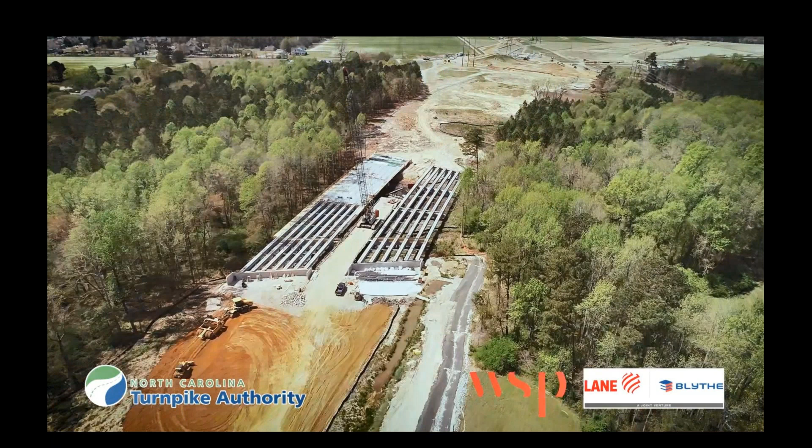So that was what we call the sizzle reel, just to get you guys excited about the project. We just had an introduction of ourselves, so we won't spend any time on that particular item. But as we get started here, I'd like to turn it over to Dennis to go through the 540 projects in more detail.

Thank you, Daniel. Can you hear me? Just get the thumbs up to make sure I'm not talking to myself. Okay, good. It's unfortunate that the sizzle reel, there's actually some very peppy music that typically goes along with that. So sorry you didn't get to hear that this morning.

But this is a diagram to show that phase one is actually made up of 3 different projects. And phase one is the piece of 540 that is currently under construction. So we have the first piece. If you'll notice on the bottom, we have our STIP designations on the bottom of this screen, the R2721A and B, and then the R2828. And we'll spend the most time today talking about R2828 as Holly and Daniel are associated with that particular project.

But the A job extends from NC 55, where the current Triangle Expressway ends, over to Pierce Olive, just east of Pierce Olive. And then the B job extends from there to just east of US 401, almost to Fanny Brown. And then the R2828, the large project, extends from Fanny Brown over to I-40. And then you don't see phase 2 on here, but phase 2 actually will complete the loop around Raleigh, the 540 loop, and it'll extend between the R2828 limits and I-87.

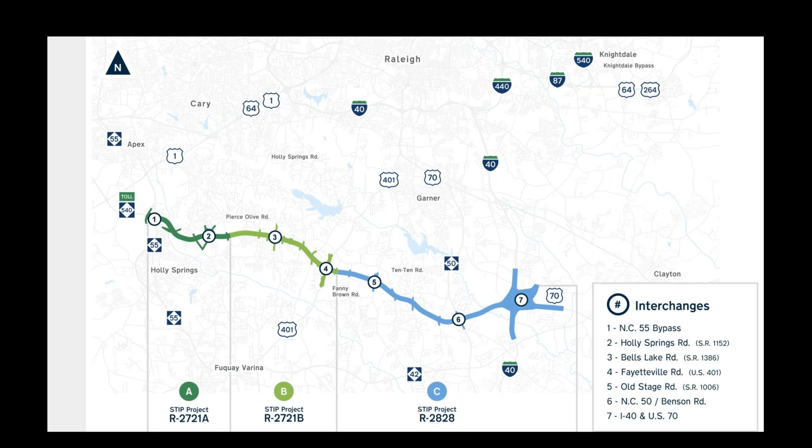To share the pavement love with the industry, 2828 is paved with concrete pavement, and 2721 both are being paved with asphalt. On the next slide, you'll see that the 2828 project is a joint venture. We actually had joint ventures on all 3 projects.

Lane Blythe with WSP was the lead designer on 2828. The A and B job was a joint venture with Branch Civil and Flatiron, who got both the A and B job, with Fleming as lead designer on the A job and HDR on the B job. You can see the contract costs here.

We reviewed over 1,000 submittals on these 3 projects. We have 95 subcontractors and over 400 pieces of equipment. We did have some bad weather in 2020 and are trying to make that up. Our design also coordinated with local governments and Wake County for bicycle and pedestrian infrastructure accommodations.

The next slide shows a snip of the 2828 project in more detail. It's the longest and largest project at 8.6 miles. New interchanges are being built at Old Stage Road, NC 50, and the big interchange, which you'll hear about a couple of times through this presentation, at I-40 and US 70.

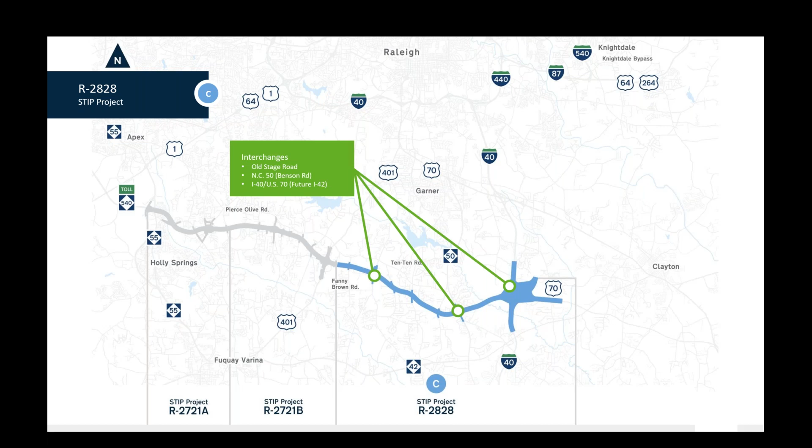The next slide has more detail about 2828, located from east of 401 to I-40. It's an entirely new location, 6-lane, fully tolled facility with all electronic tolling and no toll booths—many in the industry who were still collecting tolls through booths are switching to all electronic anyway because of the pandemic. Key design features include 9 culverts, 29 bridges, 2 service interchanges, and an innovative system-to-system interchange.

It's a 5-legged turbine-style interchange at I-40, US 70, and NC 540, shown on the right. It was nicknamed the Dream Catcher before I came on board—I think it looks like a starfish, but that name had already been decided, so I lost that battle. In the design year, by 2045, there will be almost 200,000 vehicles using those 3 facilities, so it had to have something really innovative to handle that traffic efficiently.

Daniel is now going to share some of WSP's roles on 2828. WSP served as the lead design consultant. We had key sub-consultants splitting the project with us in certain geographies and disciplines, and all of our partners helped produce a significant number of the over 1,000 submittals Dennis mentioned across the 3 projects.

Some of the major crossings, from a stream crossing perspective, included the Juniper Branch bridges, which we'll show updated photos of, and a number of Swift Creek bridges. There was a Swift Creek proper crossing and also a Swift Creek tributary crossing with some long bridges, in a very environmentally sensitive area.

Next we're going into some of the challenges presented along the way, which Holly will talk about. On every major design and construction project there are always challenges the design team has to overcome while working with the owner and contractor partners. That's something we've done very well on this project—partnering with all those folks to come up with good solutions to move forward.

Some of the areas we'll discuss in more detail today: right-of-way acquisition, utility relocation (a significant piece of this project), constructability issues, the Swift Creek watershed, some permit sites, and overall coordination among other projects and activities in the area during construction, design, and permitting. With that, I'll turn it over to Holly.

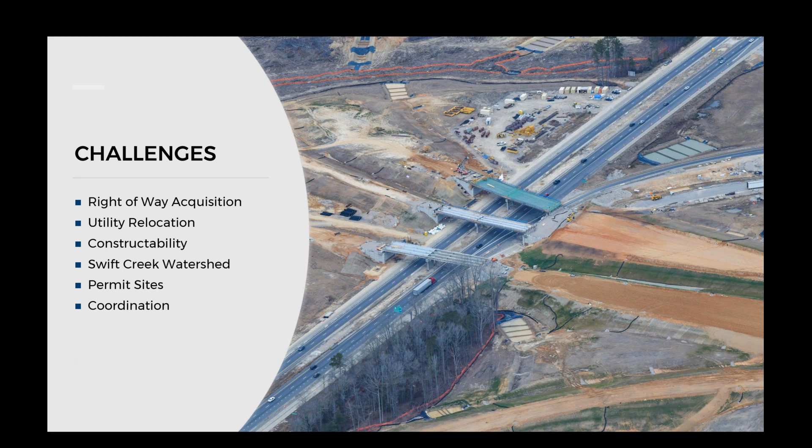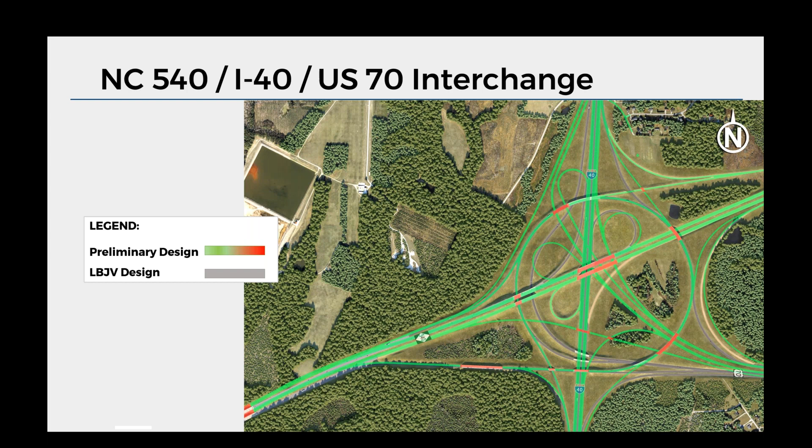On the screen here, the main thing I want to show is the NCDOT preliminary design, shown in green and red. As Dennis mentioned, they used to call it the Dream Catcher. It's a 3-level turbine with NC 540 on the top level, US 70, and underneath is I-40 running north to south. You can barely see it here, but we'll show it better on the next one, the LBJV design in gray underneath.

The turbine includes coordination with another contracting team in the reconstruction of I-40, part of a separate and ongoing NCDOT project. With I-40 running through the heart of the turbine, there were 7 bridge conflicts to consider. WSP designed all the ramp alignments within the turbine, which made project coordination a major component to the success of both projects. On the next slide, we'll show you more about what WSP came up with in the design.

There were a total of 18 ATCs for this project, with ATC 13 being chosen in the final turbine concept. This concept was a 2-level turbine instead of 3. By eliminating the US 70 bridges, instead of taking US 70 on the existing bridges, we were able to put it right on the turbine. This simplified our concept. We also were able to eliminate 3 proposed bridges and 2 existing bridges, for a total of 112,000 square feet of bridge deck reduction. Commitments of the ATC also included separation of toll and non-toll NC 540 facilities.

On this slide, I just want to point out the exact location of those US 70 bridges. It's the focal point of where I-40, US 70, and NC 540 meet. So by eliminating these bridges, we were able to simplify that design on the 3rd level of the turbine, making it a 2-level turbine.

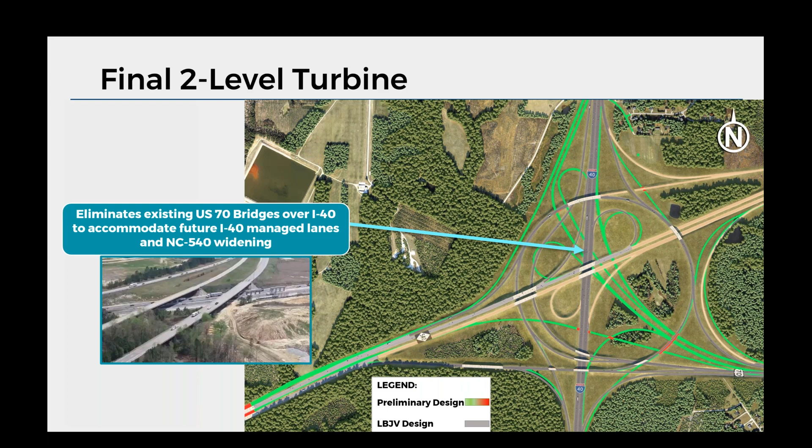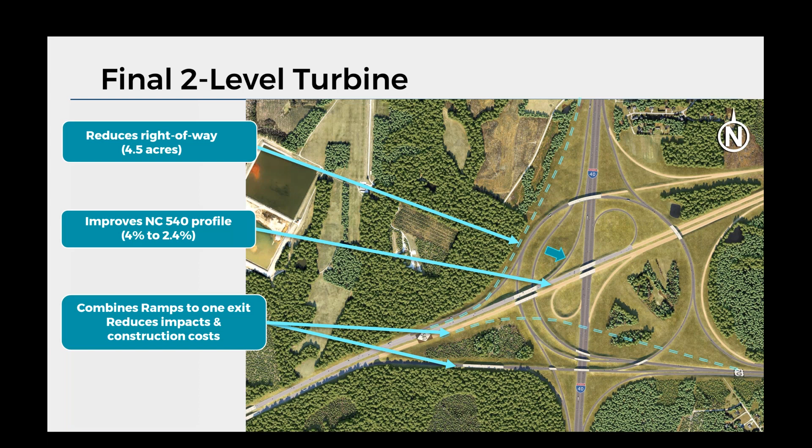On the next slide, we'll talk a little more about the reductions we were able to come up with. We were able to eliminate approximately 4.5 acres by moving that ramp into the footprint of the turbine. We also were able to eliminate the 3rd level structures by putting NC 540 on the 2nd level, which improved the grade from 4% to 2.4%. Our concept also reduced wetland impacts by combining the 2 ramps at the bottom of the screen in the southwest quadrant, which also reduced construction costs.

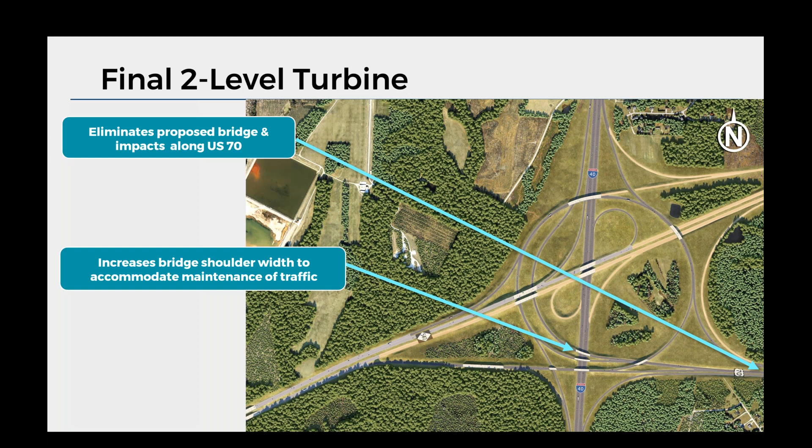We were also able to eliminate another substantial US 70 bridge that crossed Swift Creek off to the right of the page. In addition to eliminating that structure, we looked at traffic patterns—not only the final traffic patterns, but also the maintenance of traffic during construction. So we had to widen one of our structures to maintain traffic during construction, as well as accommodate a future ramp. We widened this bridge to include that future design.

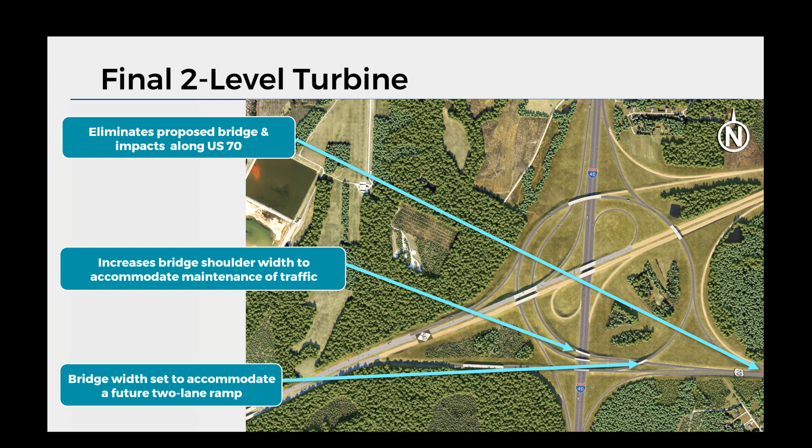As you all know, with any new location project of this size, earthwork became a major factor and objective. We spent countless hours balancing the job. At the end of the day, this project required these 5 borrow sites you can see on your screen. There was a total of about 2 million cubic yards of dirt needed in the turbine, and by using these borrow sites we were able to balance the job. All these sites were within the right-of-way limits, so we were able to maintain right-of-way, and we were also able to use our proposed structures to haul material across I-40 during construction. These efforts are still ongoing.

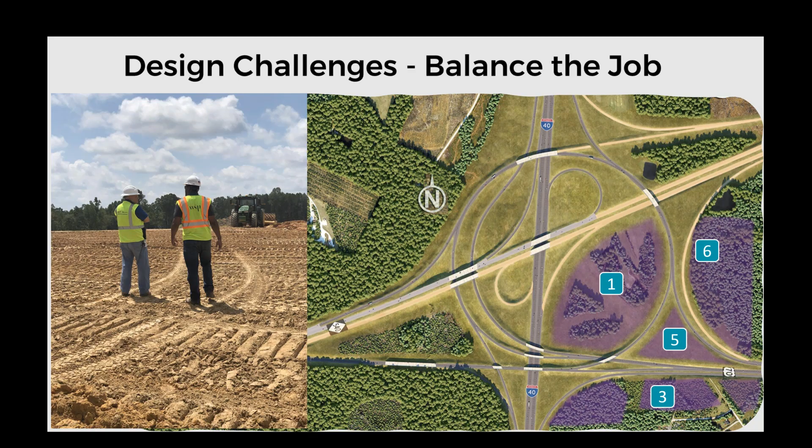At this point, I'll toss it back to Dennis to discuss some more important aspects of the right-of-way process.

So I mentioned earlier that right-of-way was acquired through different means on the corridor, but both were affected by the same factors. The R2828 was a traditional design-build where the right-of-way was actually part of the scope. The 2721 A and B, we actually let as turnkey projects, with the exception of surveying, which had to be a limited services contract.

Aside from that, you typically have your right-of-way components, your appraisals, acquisition, demos, all of it separate, but we actually compiled it into one. By doing that, we had a DBE prime on the B job, who was also a sub on the A job, and doing so allowed us to add over $5 million of work that went to DBE and small business firms in the corridor. But one of the challenges of right-of-way impact was MAP Act claims.

A lot of people have heard about MAP Act claims. In case you don't know specifically what it is, I'll give a brief background. In 1987, the North Carolina General Assembly passed the Corridor Protection Act, an effort to keep the cost of land reasonable and prevent development until the project was ready for construction. Good thought, and North Carolina wasn't unique — about a dozen states had that kind of law in place.

But in 2016, a group of property owners in Forsyth County sued NCDOT all the way to the North Carolina Supreme Court, and the court ruled that the law was unfair and unconstitutional, as the owners had not been compensated for something that had been taken. So in 2019, the General Assembly repealed the MAP Act with House Bill 131. And in May 2020, the North Carolina Supreme Court issued a ruling in Chappell versus NCDOT, where DOT had appealed decisions in a case the Chappells filed in 2014.

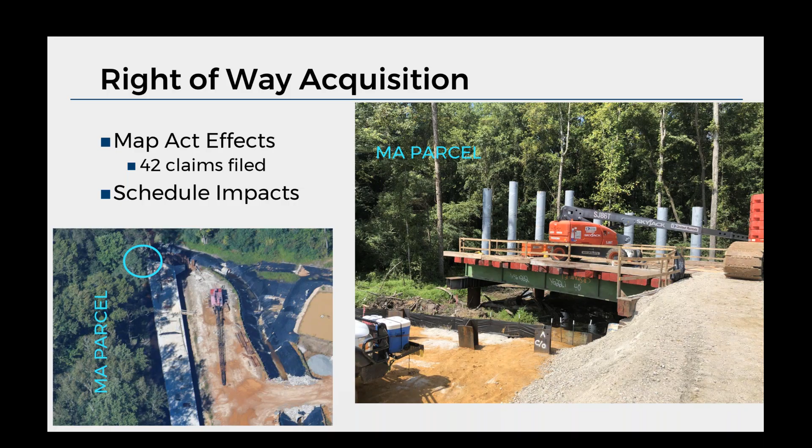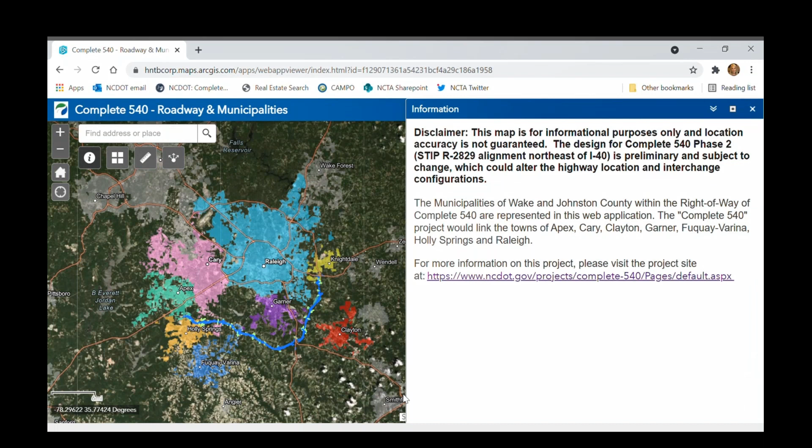On the next screen, you'll see a tool that one of our young people developed to assist citizens, and as it plays I'll narrate. We have a mapping tool on the project website where somebody can enter an address and the tool shows the proximity to the project, though originally you had to have Google Earth. Now anybody with browser access can run this tool, and the color codes represent the different municipal boundaries.

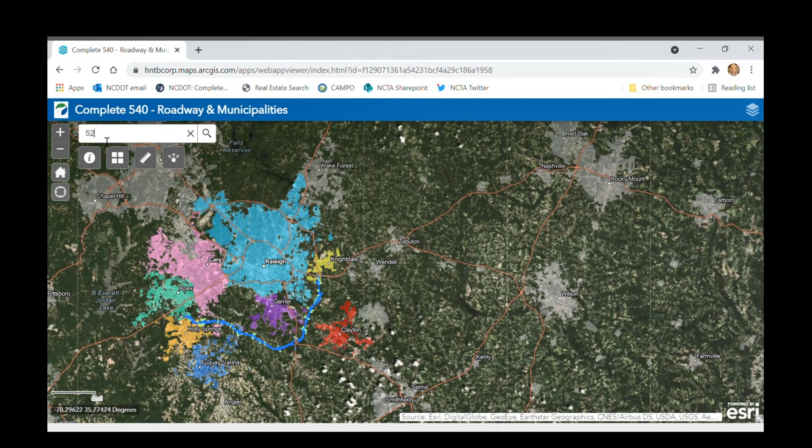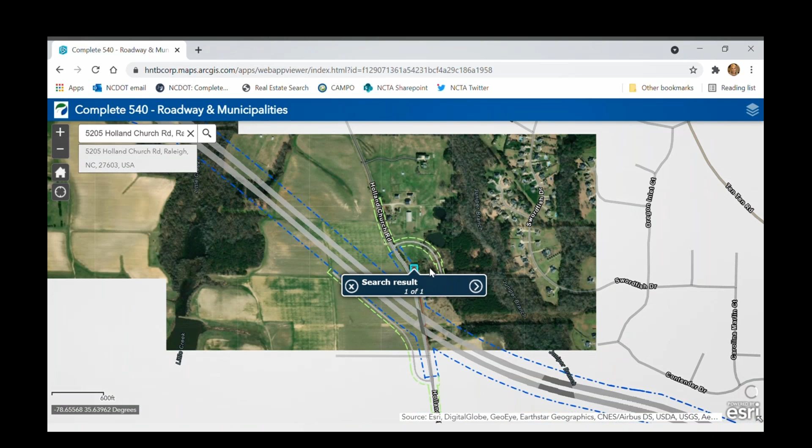You'll see here an address is being entered, and once that address is entered, the map will zoom to that particular location. What you will see here is the right of way in different colors. If you've got controlled access versus your standard right of way, you see how it's color coded. And one of the features is a measuring tool.

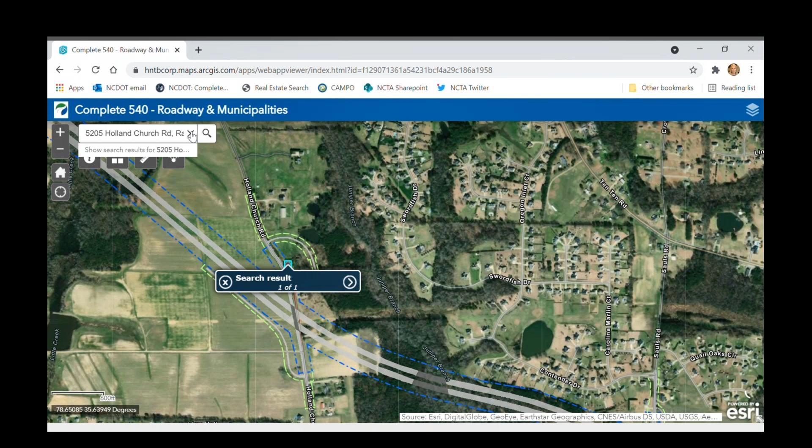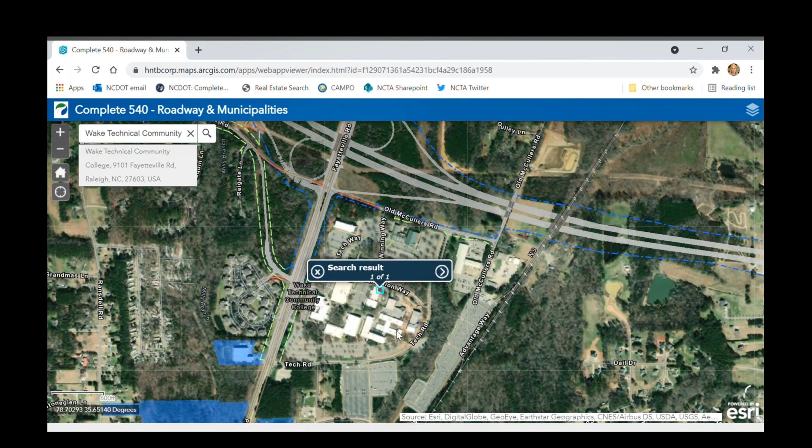So what you're going to see in the video now is we're going to switch over to Wake Tech. We're going to go over to where Wake Tech is, and they're going to measure the distance from the entrance to Wake Tech to the controlled access. You can see how on the top left, they access the measuring tool. You choose what units you want to measure and then draw a line, just like most other measuring tools on a website.

So this is very helpful. It's very user friendly, a whole lot easier than some of the other tools we've used in the past. But again, it's available on our website if you want to play with it, look at it, or use this for one of your projects at some point in the future.

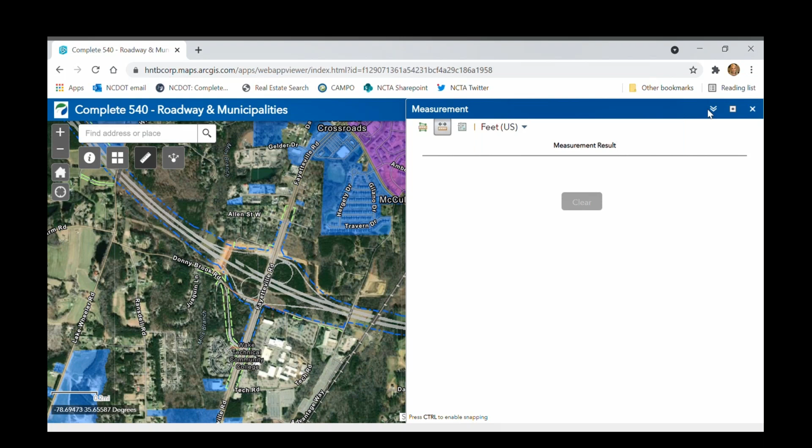But then the next screen is going to be a shot from Wake IMAPS or Wake GIS. Our preliminary design consultant, H.W. Lochner, worked with Wake GIS to show the project corridor on IMAPs as a layer that could be turned on or off. It wasn't automatically on, you had to elect to turn it on.

And the study corridor was about 1,000 feet wide in most places, and you see it's not the case here. I'll tell you why, but it's shown in the fuchsia color. That allowed people to get an idea of whether they were inside the corridor, outside the corridor, adjacent to the corridor, that kind of thing.

But once we got close to having the right of way, we provided new files as we acquired property to Wake GIS, and they refined that corridor to match the right of way limits. That's why you don't see that 1,000-foot wide rectangle going through there, because we actually had them pull it in as we purchased right of way.

And once we got through acquiring right of way, they actually turned that layer off. So if you go looking for it now, you're not going to see it, but we have asked them to turn it back on for phase 2, and we're providing files for them to turn it back on. We felt like it was a useful tool for phase 2.

The green that you see here are utility transmission lines. The top one is Colonial Pipeline. And Daniel mentioned a pretty significant effort in the corridor. They were one of the biggest pipeline or biggest utility relocations ever on a DOT project.

We originally had 8 conflicts, designed one out pre-bid. The one you see in the middle of this screen is about 8,000 feet. That's a significant effort to relocate out 8,000 feet of pipeline.

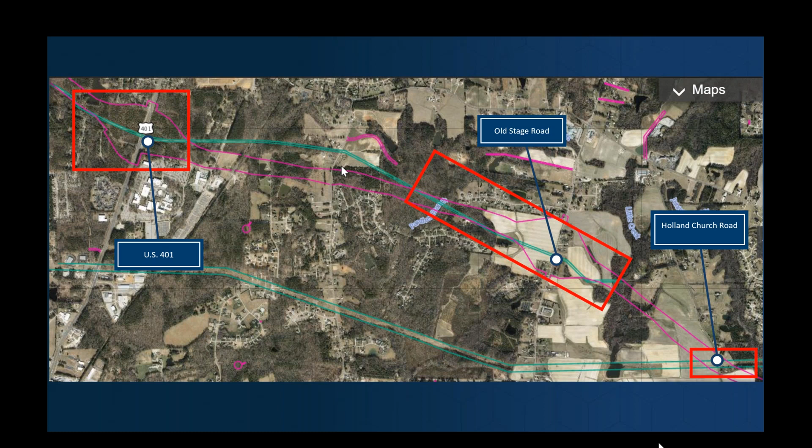So this is Holland Church Road when it pops up here. You'll notice it is closed to traffic. At this location, there was a conflict with an overhead Duke transmission line, and that's Holland Church in black. We had a conflict with a Duke overhead transmission line, which will show up here in red.

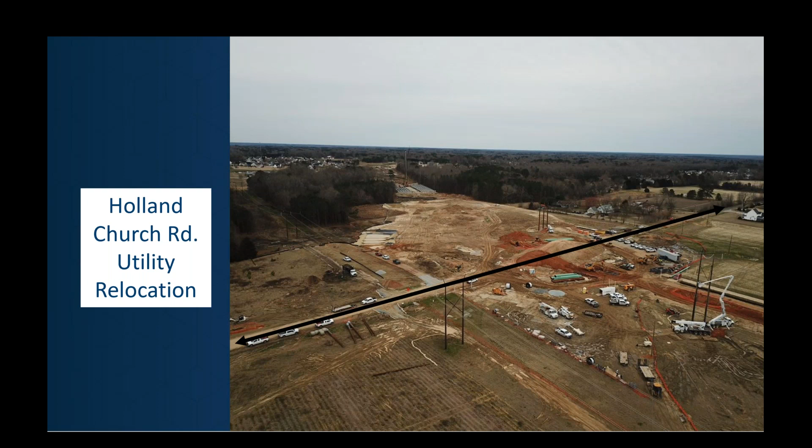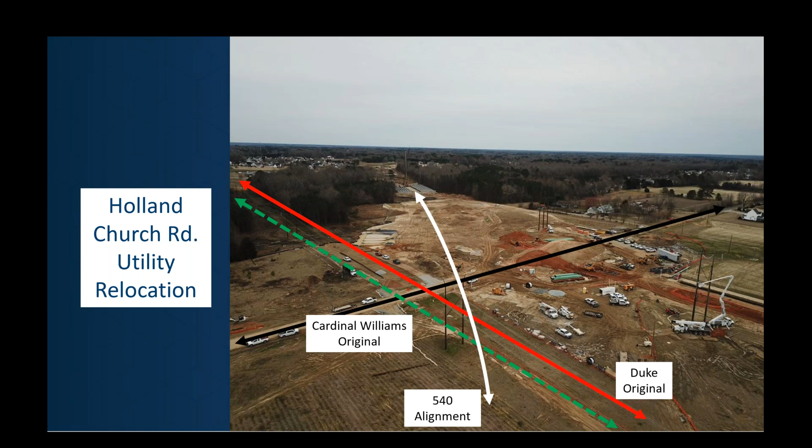We also had Cardinal Williams, which is shown in green. And the alignment, which you'll see animate here, was in white. So you see we had a pretty significant conflict with 2 major transmission lines.

There were compressible soils here, and so Cardinal Williams determined that they were going to have extra stress on the pipeline if they placed it before these soils settled out. We would normally not typically purchase easements for utility transmission facilities. They don't like for us to do that.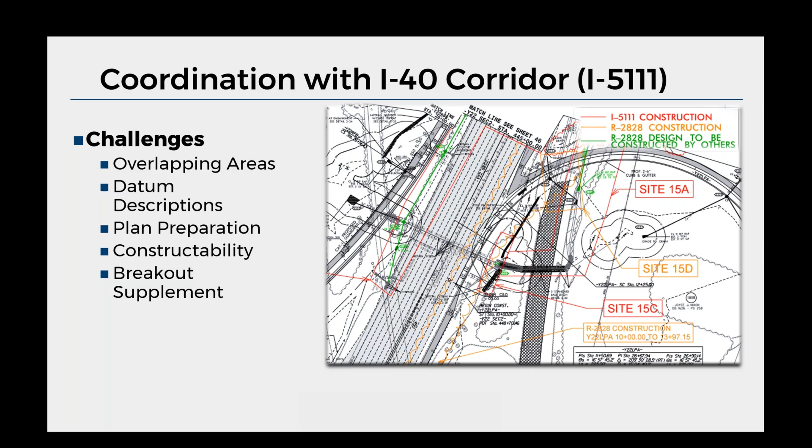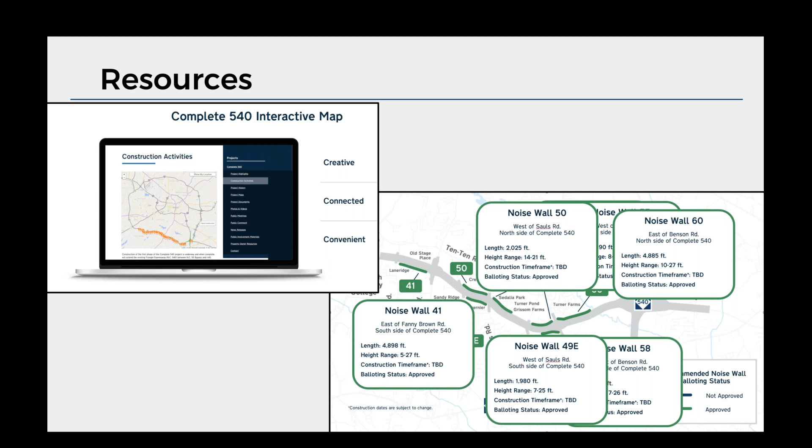One of the other tools that we developed at WSP to help the public understand the project was this WSP web app that you can get to through the NCTA project site. On this web app, we have an interactive 3D rendering of the project. It has a lot of features - it allows you to go to any of the particular areas along the project to see the renderings. We've tried to put in as much detail as we could related to the noise walls and the signing and just the features of the project.

It's got some areas where you can click on a little icon with a lowercase 'i', and it'll give you information about that particular area - whether it's real brick, or the aesthetic features, or something interesting about the project. It's also got the ability to look at it from an aerial perspective, and you can click on any of those areas and it'll let you go to them and show a 360 view of what you would see from that particular area. It's pretty interesting that you can get to a lot of the different areas on the project and see what they will look like when it's complete. On the far right, you can see another area in the turbine area of one of those locations.

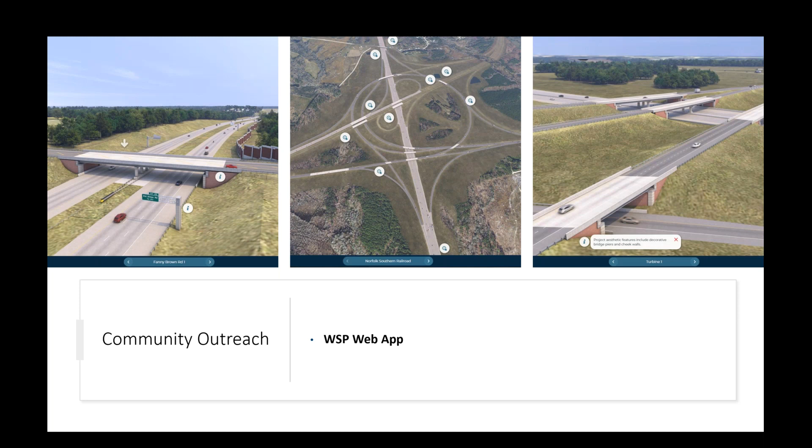There's also a swipe feature that I like a lot. Starting on the left side is the existing interchange with US 70 that's there now, and on the far right is kind of the ultimate. I've put progress photos in the middle where you have that swipe feature, and you can see where it was just virgin forest, and now it's going to be part of the transportation network moving forward. You can see that progress along any portion of the project, so it's a very useful tool.

We've also gone in and tried to update it with construction photos, so at some locations you can see actual progress photos along the way of a particular element, be it a bridge or some roadway pieces. It's something that provides a tool for the public during construction.

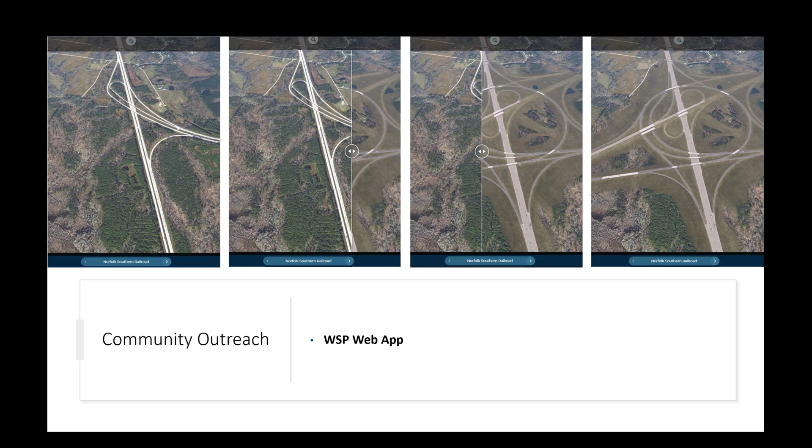We have some progress photos now that we've tried to update, and we got some more just last week, so some of those are in here now. This is a new location project, so there's been a lot of grading going on. Dennis talked about the rain and other factors, but there's been quite a bit of work performed out there. I'm going to go through these and talk a little about them, but Holly and Dennis, feel free to add any color commentary.

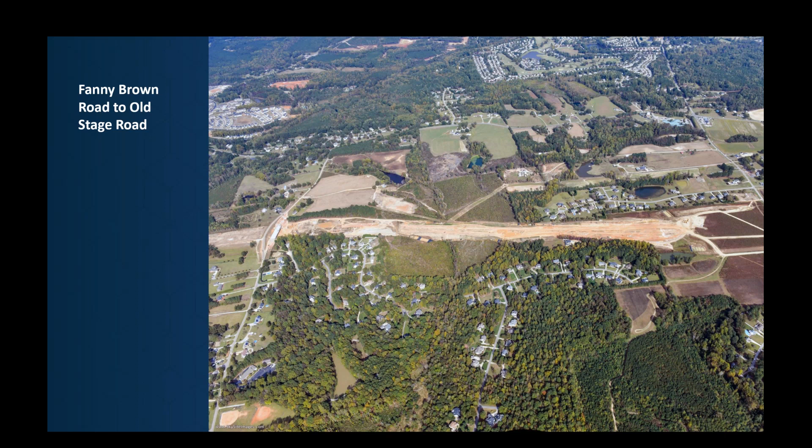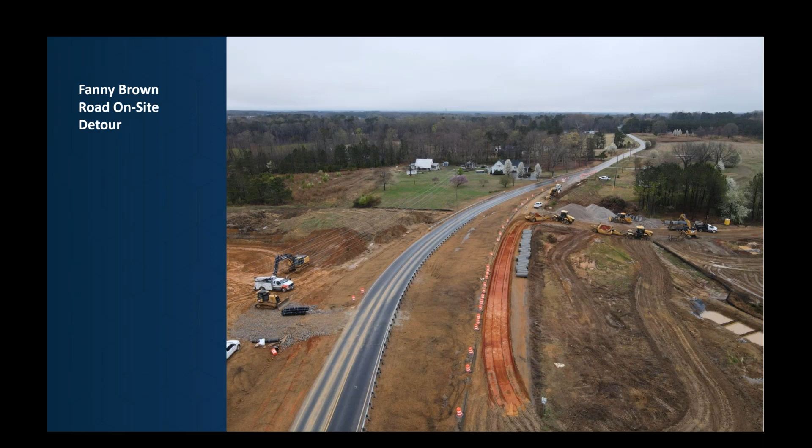This particular photo is on the west of the project. That's Fanny Brown on the left side of the screen, and you can see the proposed bridge being built. We've got an on-site detour established, and this is a dated photo where we put in that detour. You can see utility lines in the area, and on the right side is where the old roadway was—it's been removed for the detour. Now this is how it looks today: it's been put back in operation, the striping's on the bridge, they're back on the new roadway with the new bridge constructed, and you can see they've removed part of that on-site detour.

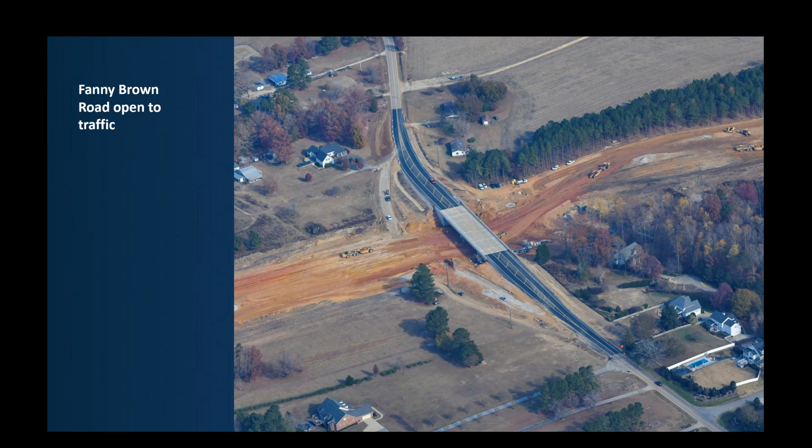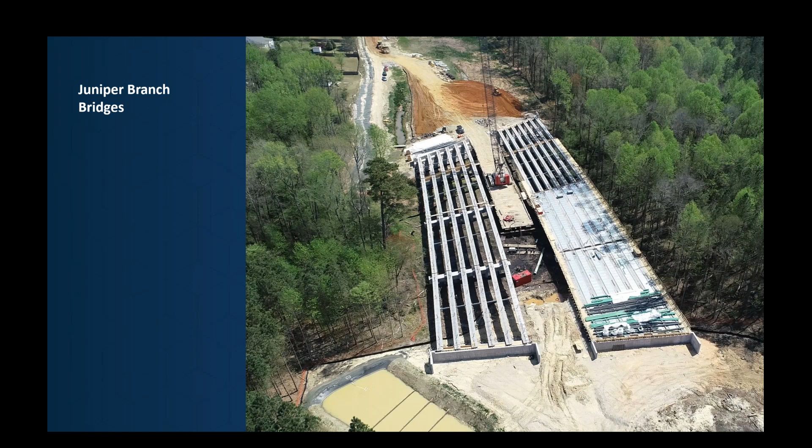This is the Juniper Branch Bridges, a dated photo from earlier in construction. This was one of our ATCs on the project where we proposed a radial bridge concept, meaning our bridge abutments weren't at the same location. You can see on the north, top side of this photo, where the bridge ends have differing starting and ending points. That was to reduce the structure size while still avoiding all the wetlands in this area.

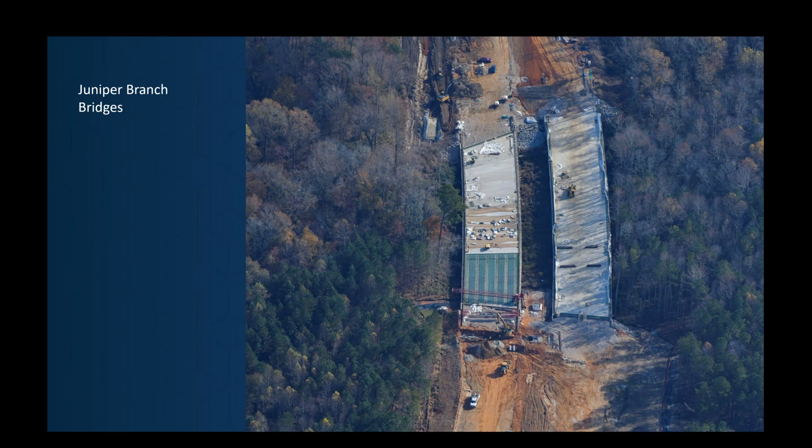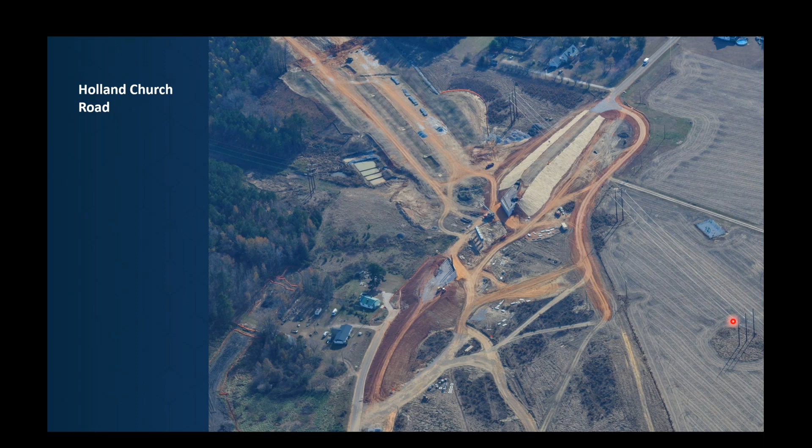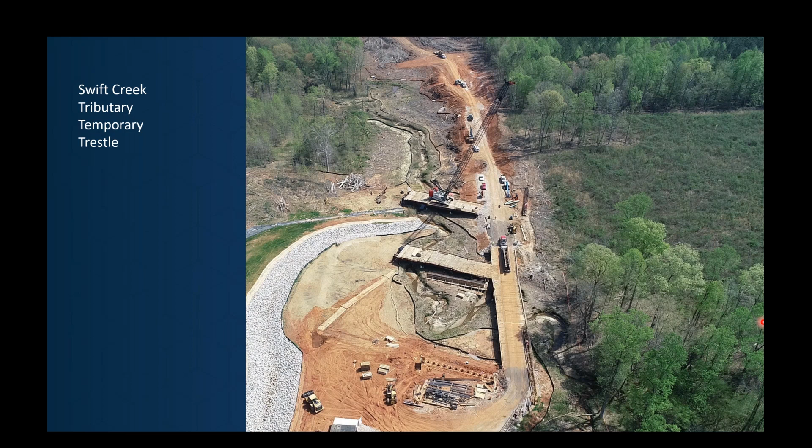All right, this is an earlier photo of the Swift Creek temporary trestle. This is at what we call Bridge 9. We use the trestle to stay out of the wetlands. You can see the fingers of the wetland and the trestle being built here. This is long before a lot of the construction was underway, but you can see the access road and different things in this area. And then the next photo shows a more recent photo where one of the bridges has already been constructed and is being progressed.

On the right side, you can see the fingers of those trestles are there for each of those bents, and you can kind of see if you zoom in each of the piers being constructed and a couple of girders being hung. So that's still in progress out there at bridge number 9.

Another thing I was just going to add, Daniel, on this is some grading also had to be done just under these bridges with the profile and the way the grade worked here. Another fun activity that we did in coordination with permitting was getting a grade not only for the proposed alignments but underneath the bridges as well.

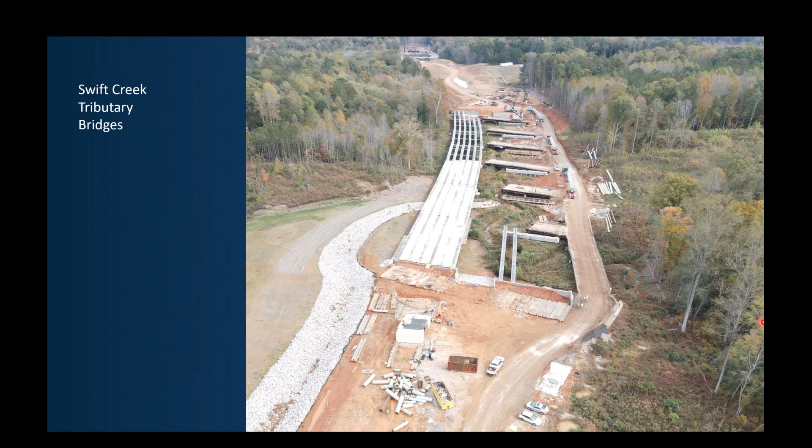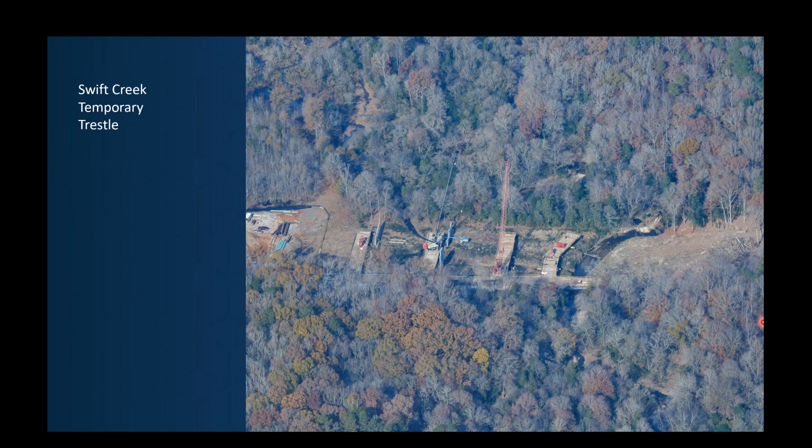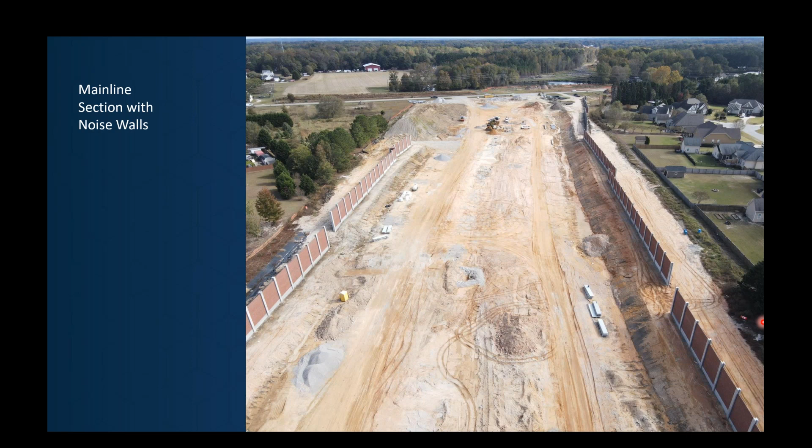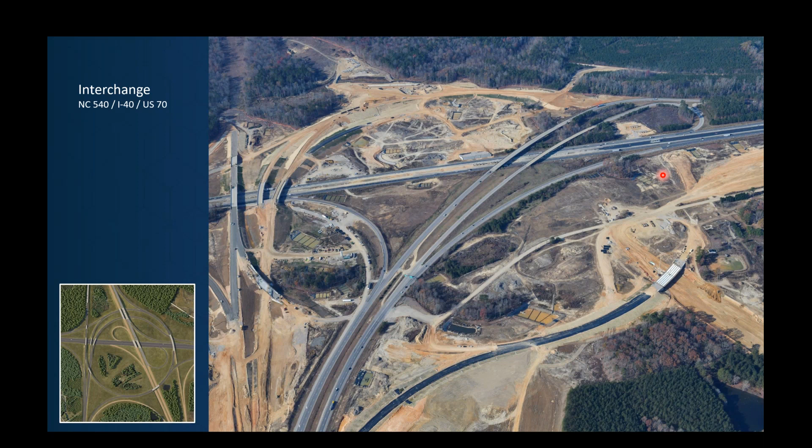Here's another view of that interchange. This one does capture that bridge I was talking about, so you can see a bit bigger scale of all that's going on. One of the next steps will be, when we remove these US 70 bridges, to get some traffic from US 70 onto parts of the turbine. That's why you're seeing some pavement being put in this area, and there'll be some two-way traffic on one of these bridges as well.

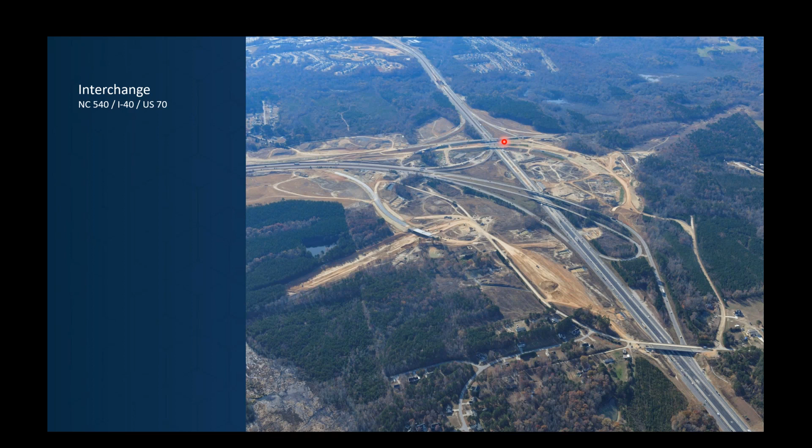This is the area we were talking about with those 3 bridges. You can see they've put some material on the bridges so they could haul across those. This one is the one that was widened to allow for, since this is a turbine, everything to go in one direction. We're actually going to use one of those bridges as bi-directional during our temporary traffic phasing.

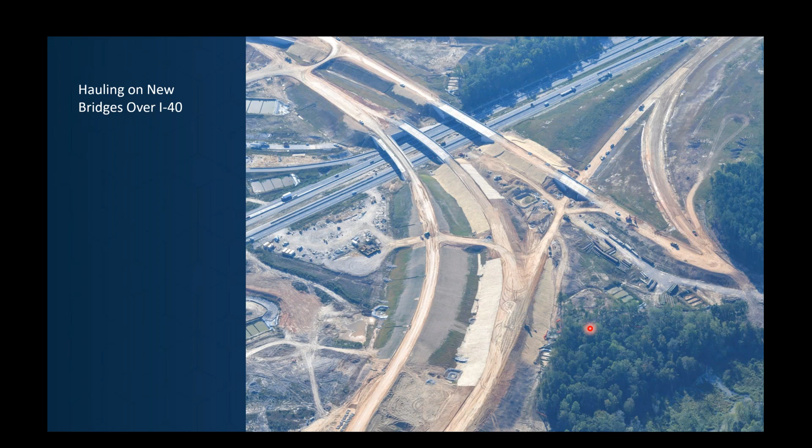And there's some of the equipment that's going across those new bridges as we haul back and forth over I-40.

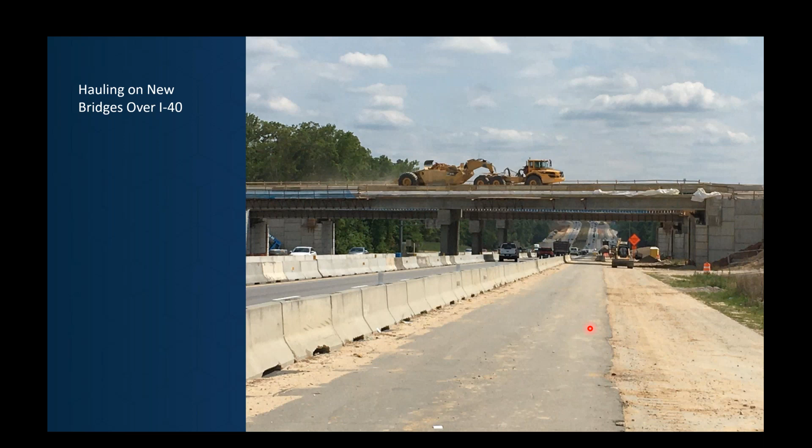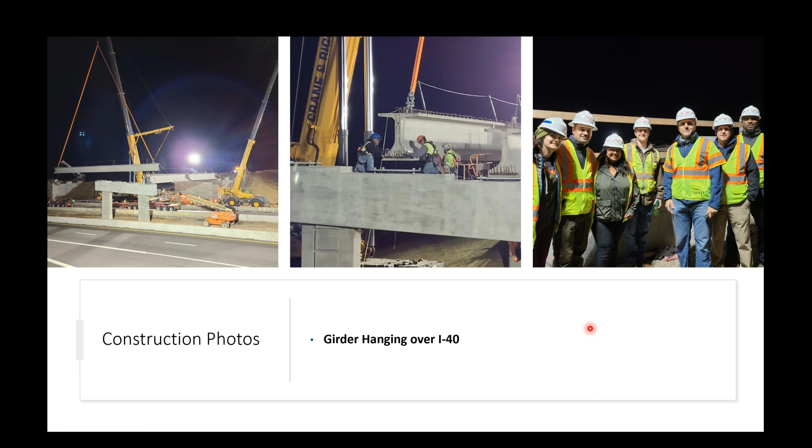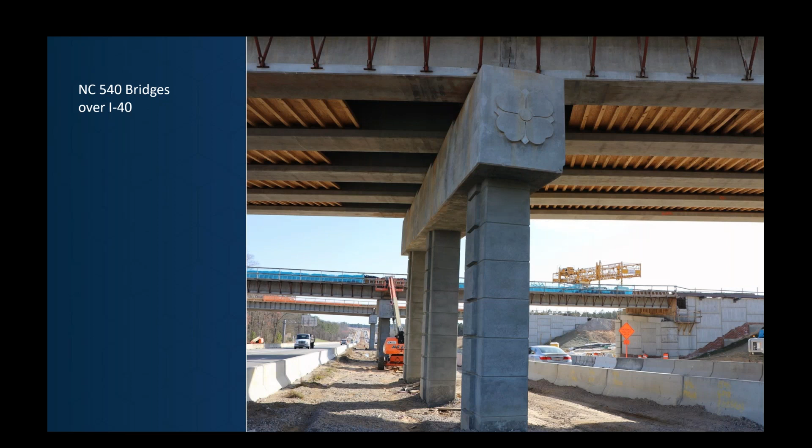This is you, Dennis. Okay, it just came up.

Thank you, Daniel. So one of the things unique to this project too is we had an archaeological site. In this particular site, between Holland Church Road and Sauls Road, materials dated back to the Archaic period. We found projectile points and Middle Woodland period pottery recovered during those excavations. So you actually had 2 different periods, dating between 8,000 BC and 800 AD.

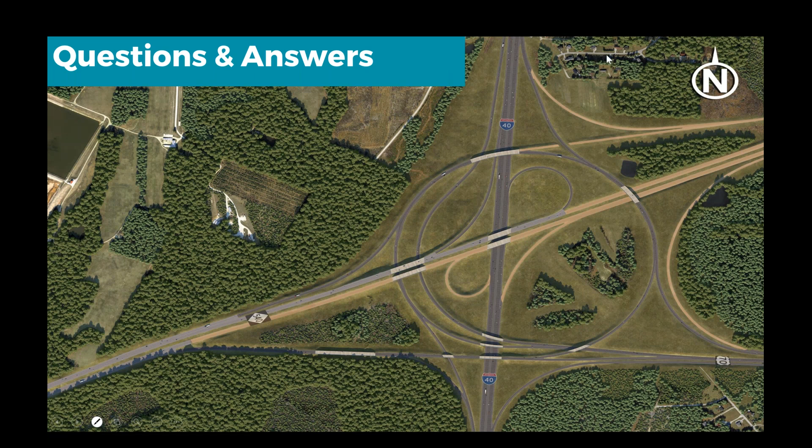Yeah, I guess that we tried to do what we can in the design of these facilities to make sure that people were aware of what they're entering into. I think part of it is just education as people start to use the facilities more, same as when roundabouts started being introduced more in North Carolina. But we had a pretty extensive signing program with this one to help alert people not only to the safety of the facility, but also where they're going, because this is a brand new concept.

As Dennis said, this has not only two facilities, but three entering and exiting, so there was a lot of destination signing to it. We tried to incorporate all those features into it as much as we can. But other than signing and some pavement markings, there's not a whole lot we can do except for educating them on the type of facility they're using.

Yeah, we saw obviously where the traffic was coming from in the projections, and that was one of the things we had to prove to NCTA with our ATC — show where those vehicles were going, how they were going to get into the facility, how they're exiting the facility. We also, as Holly mentioned, had to make sure that we were keeping the people using the toll facility versus the general public separate, on different ramps.

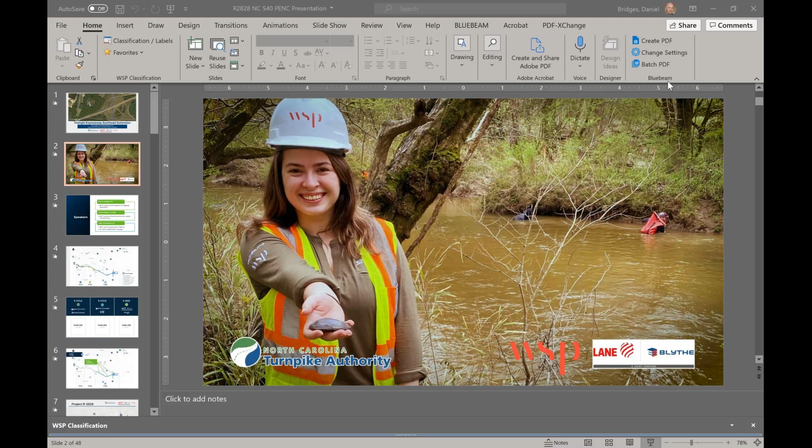So I'm sure most everybody knows that this project was subject to litigation, and so we actually worked with SELC to resolve the concerns and address those concerns. As part of the settlement, one of the things we agreed to was to fund for a specified amount of time a mussel propagation facility where these mussels would be grown, so the numbers could be improved and added to when those mussels were relocated back to the environment after they had reached a certain age. So it was kind of a twofold effort: relocate the ones that are there and help grow new ones.

Okay, what is the schedule for completion of the entire loop? So right now, our target was late 2023. One of the projects right now is actually sliding into early 2024. We're in conversations with the contractor about possible ways he might pull that back. He's not necessarily optimistic, so right now we're probably looking at opening sometime in early '24.